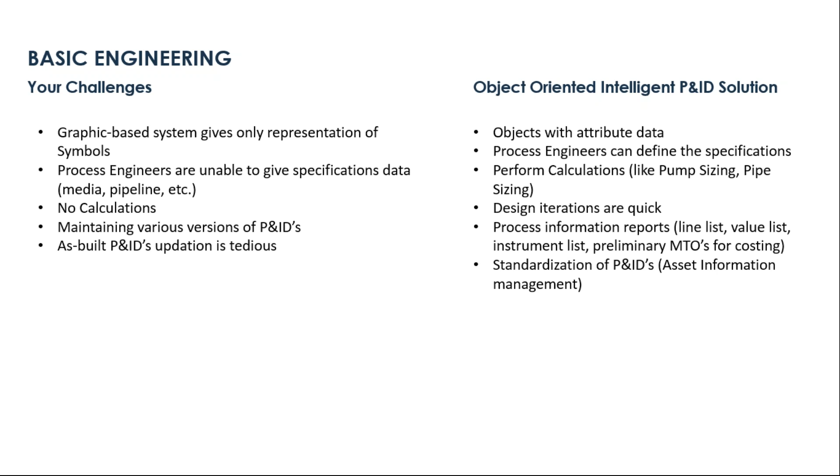Second is, of course, the pre-bid proposal or procurement team, where this team definitely needs a lot of material specifications. They need cost estimation information to do the bid management process. So they need a lot of procurement reports. They need a lot of asset information which they can actually use to plan their long lead items, buyouts, etc. So these are the challenges faced by procurement and pre-bid or proposal teams.

Talking about engineering and design, of course, the challenges are more where they want error-free P&IDs. Data consistency is a huge challenge again in this phase. They have to do a lot of design iteration. So you need a system which can handle change management in a very effective way. You need a system which can do built-in revision control or reports, or you can configure various types of reports. So these are a few of the answers to these challenges.

And lastly, the operations and maintenance team - this is the team who needs updated information at any given point in time. So maintaining and updating P&IDs is a very crucial part of it.

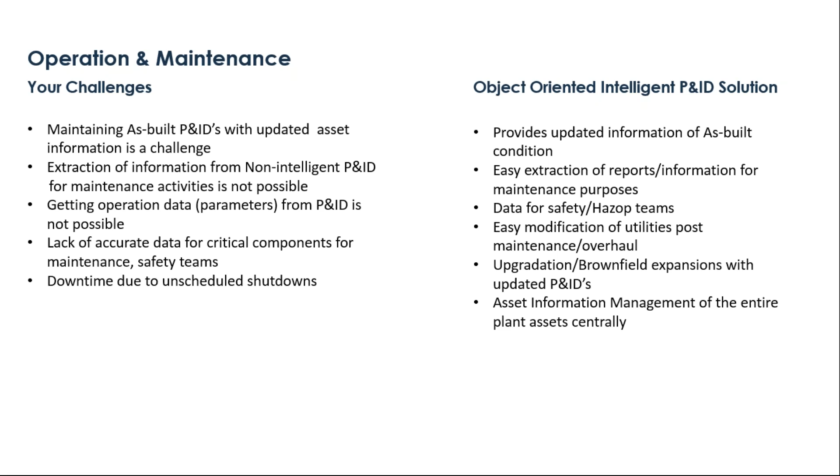The object-oriented solution helps in easy modification of all the utilities or plant objects, and any changes due to operation or maintenance should be updated in the P&ID, so that you have as-built P&IDs all the time. You can actually look at P&IDs as a good asset information source rather than just a P&ID drawing. Let's see what this object-oriented P&ID solution is all about.

We're going to talk about the calculation capabilities, the spec-driven or smart P&ID solution, what exactly it is, and how different it is from other solutions. We are also going to talk about revision management and change management for error-free P&IDs. These are a few of the benefits you are going to see in the live demonstration now.

So let us see what the system is all about.

As we talked in the presentation, we are going to go through a quick demonstration of CADISON P&ID Designer. We have gone through the different phases of the plant life cycle where P&ID drawings can be used, such as P&ID at concept or feed or basic engineering, P&ID at pre-bid or proposal, P&ID at detail engineering, construction, and P&ID at as-built, or asset management information. We'll see what type of different reports we can extract from our P&ID drawings at each phase, and also quickly go through some key features of CADISON P&ID Designer.

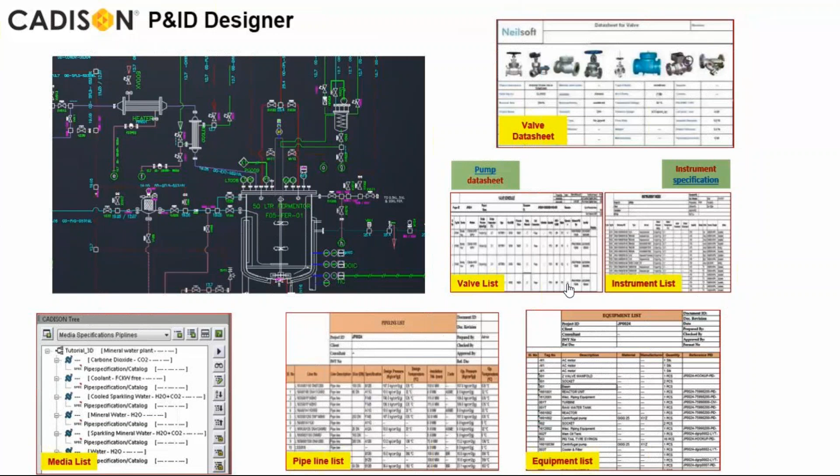So we will first talk about P&ID at concept, feed, and basic engineering.

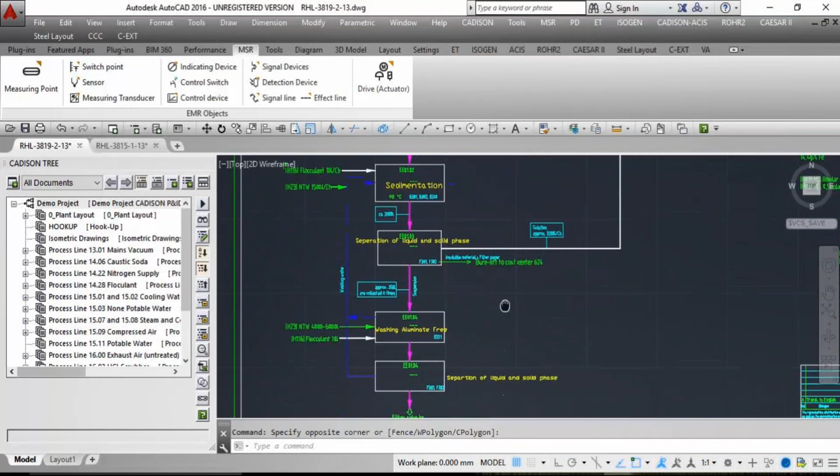This is one of the sample process flow diagrams which has a couple of process blocks as well as connections to different medias. It's a process flow diagram for an alkaline extraction project where different processes are going on, starting from mixing, testing, dissolving, and sedimentation, as well as extraction of alkali.

Now we can quickly extract different types of reports during concept and basic engineering. First, on the left-hand side, you have the CADISON tree from where we can see what are the different medias or services used in my project, and from the project area we can extract the media list.

We can extract the media list either in Excel as well as in different other formats. We add it to our document folder and the media list will be generated. Here you can see different attributes can be populated and extracted to your drawings, such as media number, description, chemical formula, and the P&ID drawing associated with it. You can also have a revision document for the media list, so whenever you update your drawing, that will be automatically updated to your reports as well.

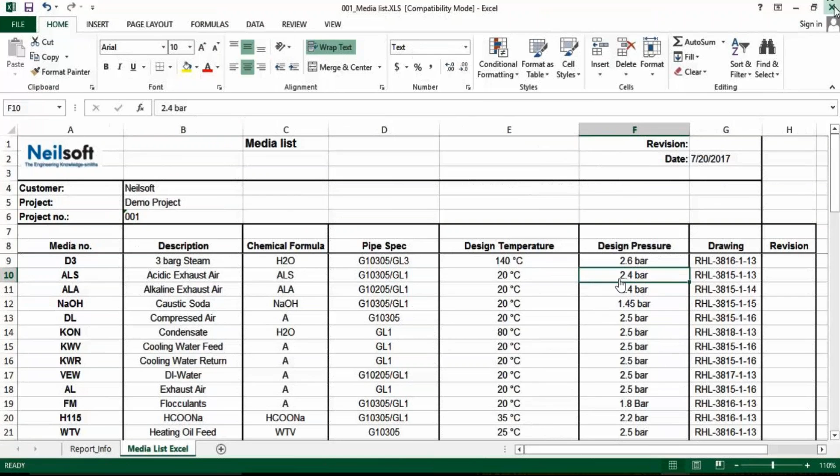As we have gone through the process flow diagram, the same process flow diagram will be used to create your P&ID drawings. So we have document folders for all the P&ID drawings, which have the medias or processes we have already created in our process flow diagram.

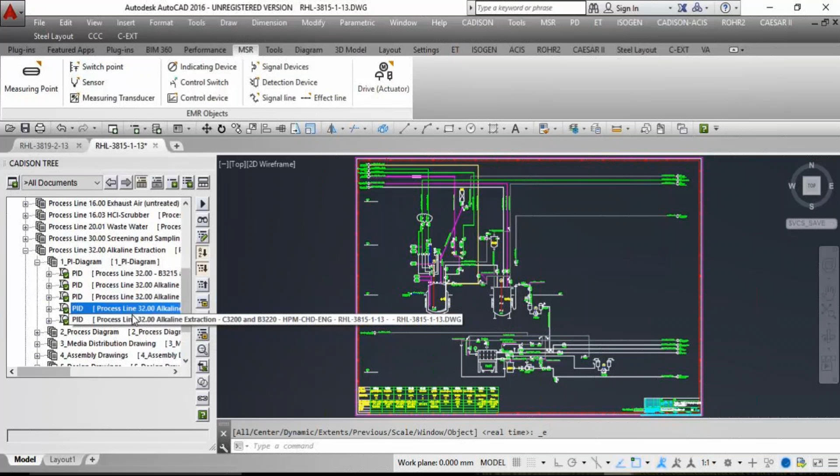We can also extract the pipeline list for our concept and basic engineering life cycle, where we can extract reports based upon our pipeline list. You can see the pipeline number reports with all the different pipelines, process media, pipe material, or insulation thickness, even with the P&ID drawing number added to your reports.

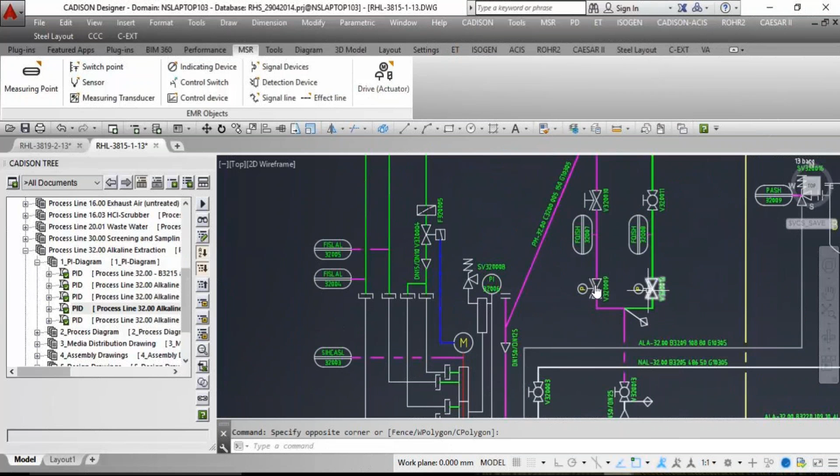As we have done for the pipeline list, similarly we have lots of valves in our PID drawings, so we can extract the valve list also based upon the different types of valves available in my P&ID drawing. Again, we can go to our P&ID drawing, go to the report folder, and quickly extract the reports.

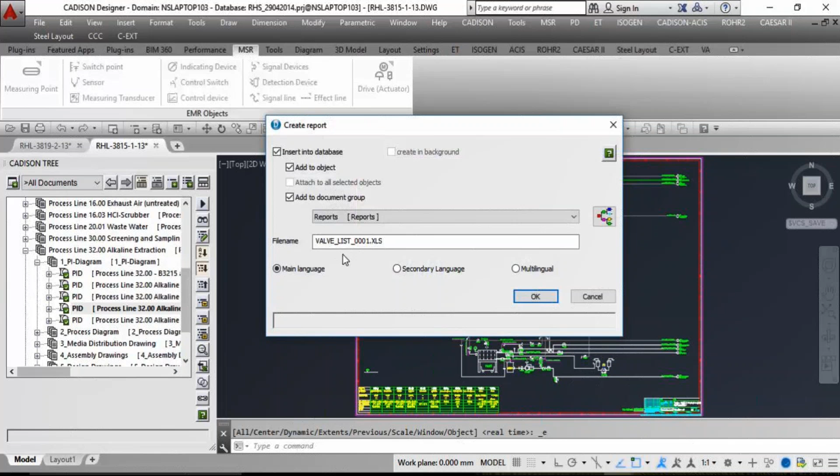There are predefined templates for all the reports available. This is some of the different types of reports you can extract using CADISON PNID. You can see for the valve data summary we have media information, valve description with the tag number, type of valve with the end conditions, and other specification-related values, with the PNID number added to your reports.

Another type of report you can extract is your instrument list. So you can go through the different types of instruments, and its information can be available using the object inspector dialog box.

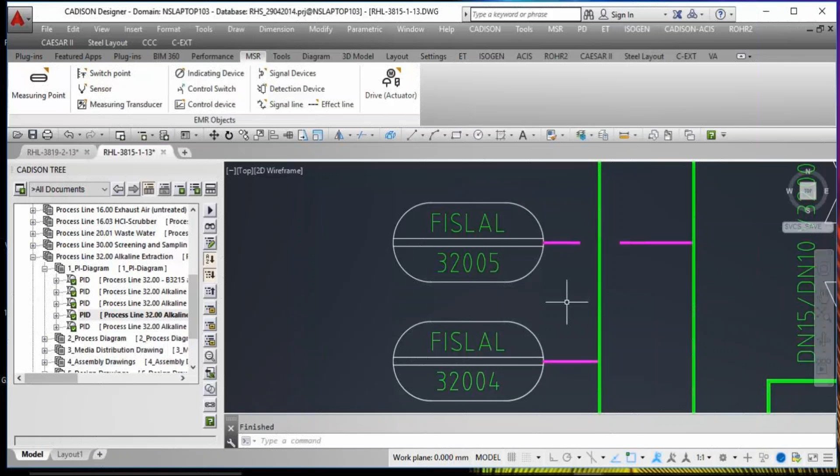There are different types of instruments that can be created, whether it's a measuring point or an instrument for a safety valve.

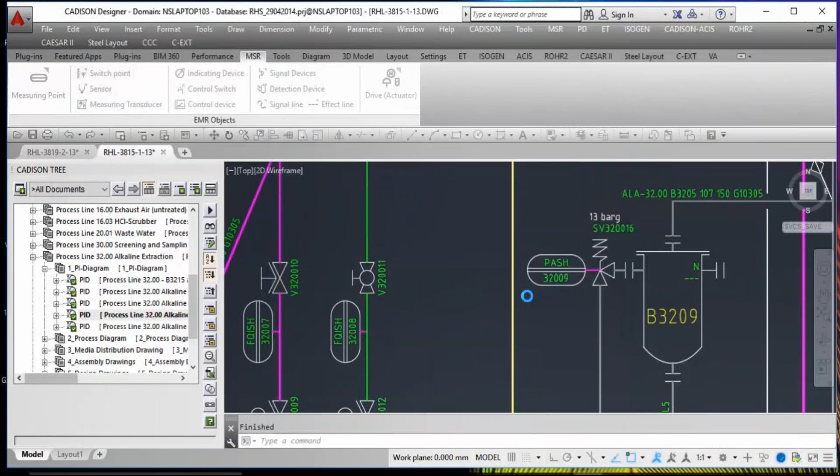So you can extract the instrument list reports from PNID drawings. Let's say we select the instrument list report template, and your instrument list reports will be generated. This is how we can quickly and easily extract reports based upon the objects available in your PNID drawings.

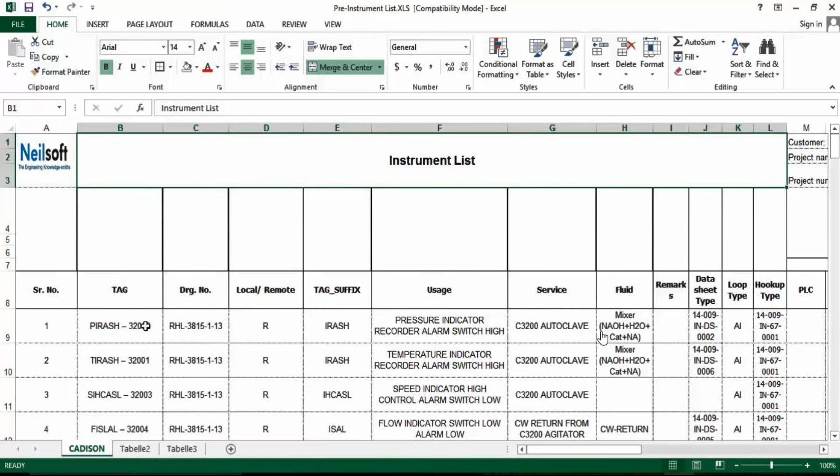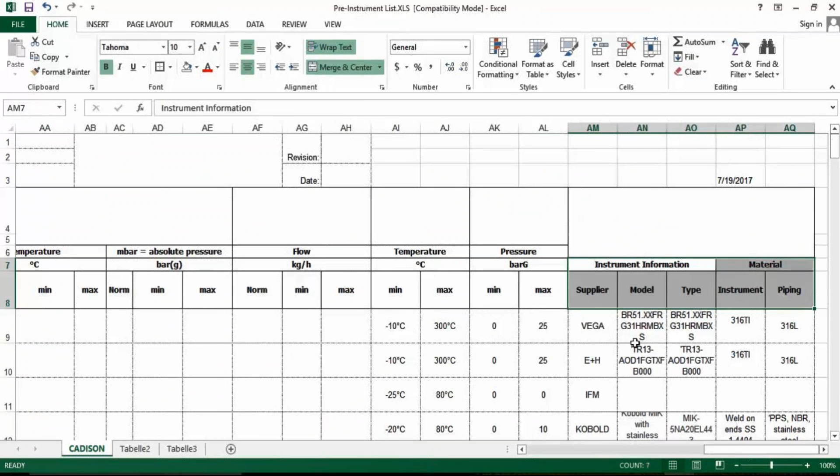These reports are fully configurable. You can add or remove any properties from the report template as required per your project requirements. You can see tag numbers, drawing numbers, different information related to your instruments available in your report format, along with supplier, model number, and types.

Now there are a couple of special components or special items in your PNID, such as coupling, compensator, or maybe a strainer, pulsation damper. These are all special items. You can generate reports for your special items also, which will have different templates and different attributes available.

This is a report for special piping components, item names, type of component with a tag number, size - all those values will be populated. Even the quantity can be generated.

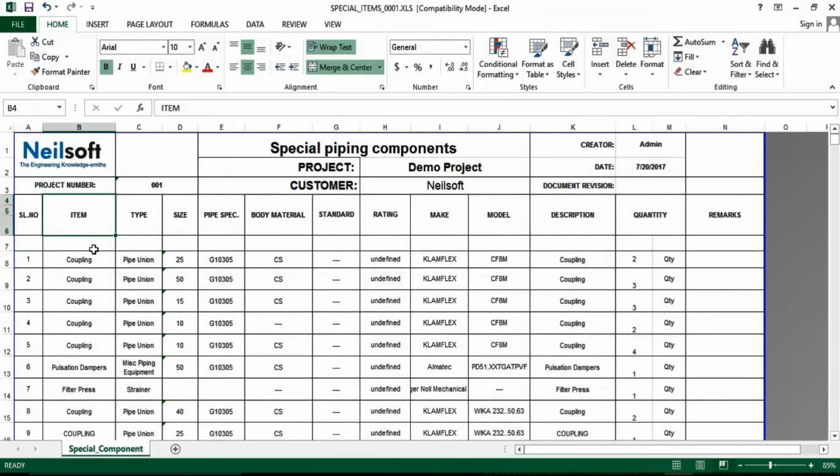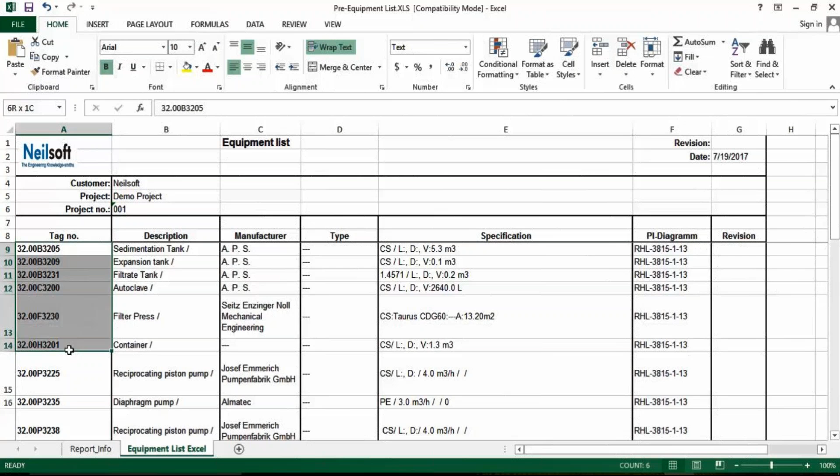Lastly, we have a couple of equipments available in PNID, such as sedimentation tank or filter press. So we have reports for vessel list also, because in basic or concept engineering we generate the vessel list also. This is a predefined equipment list available with all the tag numbers, description, and specification details with the drawing number.

Now we have seen the PNID at a concept or basic engineering phase. Let us go through the P&IDs and see how different types of reports can be generated at the pre-bid and proposal level.

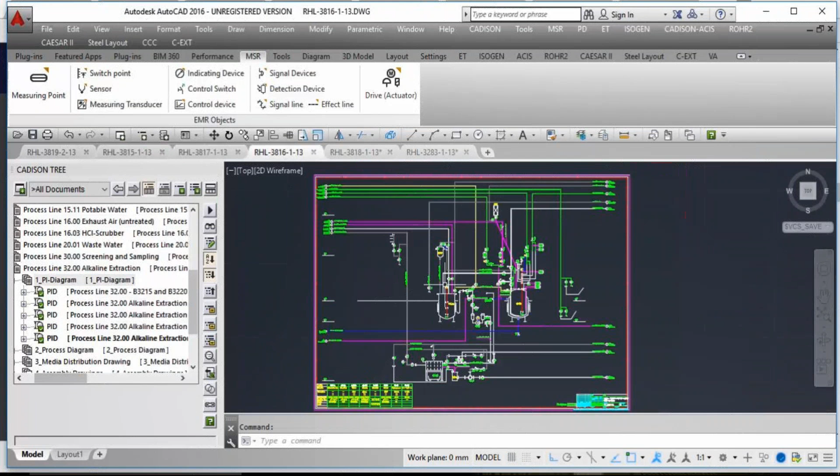Once our concept engineering is done, during pre-bid we can have a couple of P&IDs. Right now you can see there are 4 or 5 P&IDs available on your screen. During the pre-bid phase, I want to generate the list of P&IDs for our pre-bid or proposal engineering, based upon our document folder level.

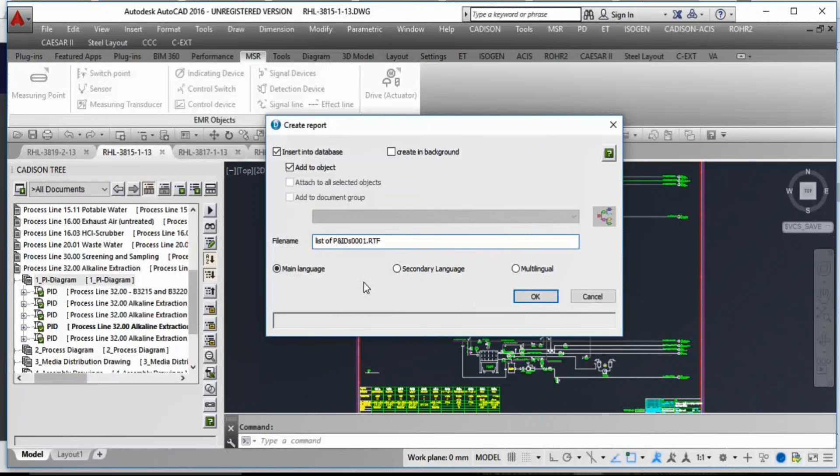You can have the reports in Word format as well as in Excel sheets. Here you can see the description of your P&ID drawing, drawing number, sheet number. If it is a revision, you can get the revision number as well as the creation date. This type of report you can quickly and easily create at any level - at the drawing level, document group level, as well as the project level.

We have seen during the pre-bid phase the list of P&IDs. Now let us quickly see the equipment list for all the P&IDs at the document folder level. We can create these reports.

So we'll go to the vessel list Excel report template, and we can say this is a pre-equipment list for the pre-bid proposal level. Based upon the number of P&IDs, it will generate the equipment list, which consists of all the tag numbers for the equipments, description, different equipment specifications, capacity or volume, and design conditions also.

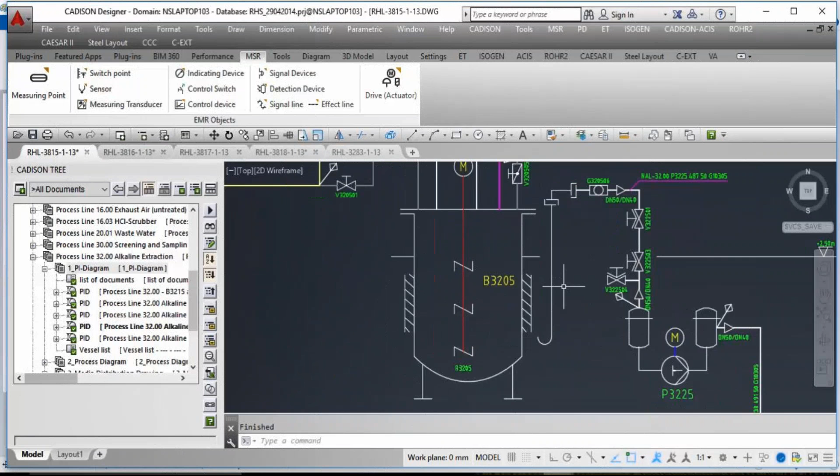Now, one of the important report formats during our pre-bid is data sheets for the equipments or for the pump data sheet. For example, we have a sedimentation tank with tag number B3205, and it has all the relevant information in your PNID, and we want to generate quickly a data sheet for this equipment.

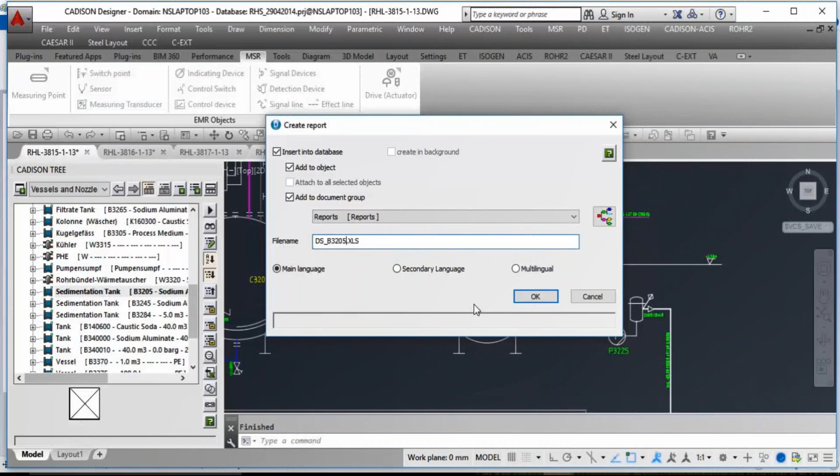On the left hand side we have the CADISON tree, where we can filter out to our equipments. I will just filter out to my sedimentation tank, and generate the reports by selecting the sedimentation tank there. So it will add the file name for the datasheet for B3205, and based on that our data sheet is created.

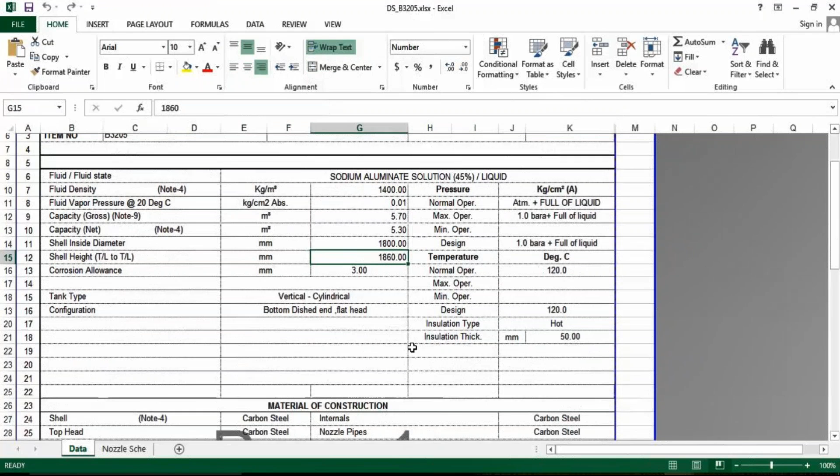You can see it is showing all the relevant details of your project - first of all the location, project number, what service it is flowing, the item code, the data related to fluid state, capacity and specification details of equipment, and material of construction also.

You can also have, based upon the data sheet template, a nozzle schedule where all the information related to nozzles can be seen in your data sheet report. So this is a simple example showing that whatever data or information is in your P&ID drawing can be automatically extracted to your report formats based upon your project requirements.

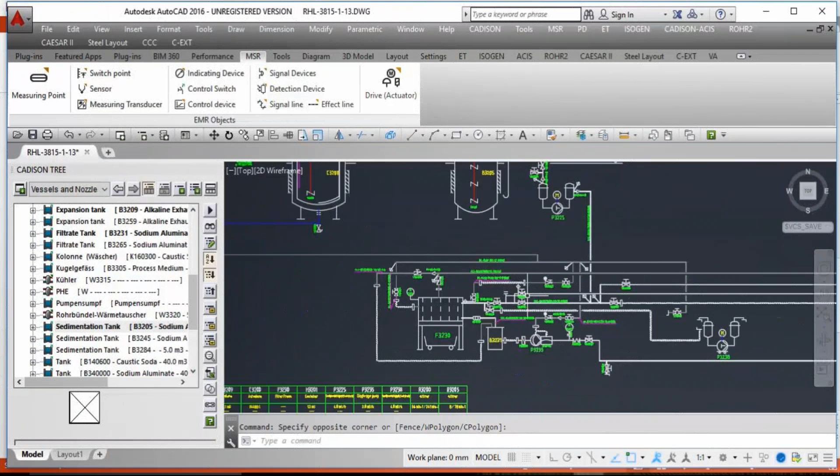Another important document during our pre-bid and proposal engineering is cost estimation. Let us quickly take an example where you have a number of valves in your PNID drawings, different types of valves, and we have to quickly do the valve cost estimation.

If we select a valve, we have an attribute known as list price. This list price can either be taken from a vendor catalog, added manually, or we can import it from an Excel sheet format to add that list pricing. Once the list price is added to an object, we can extract the reports for the cost estimation of the valves.

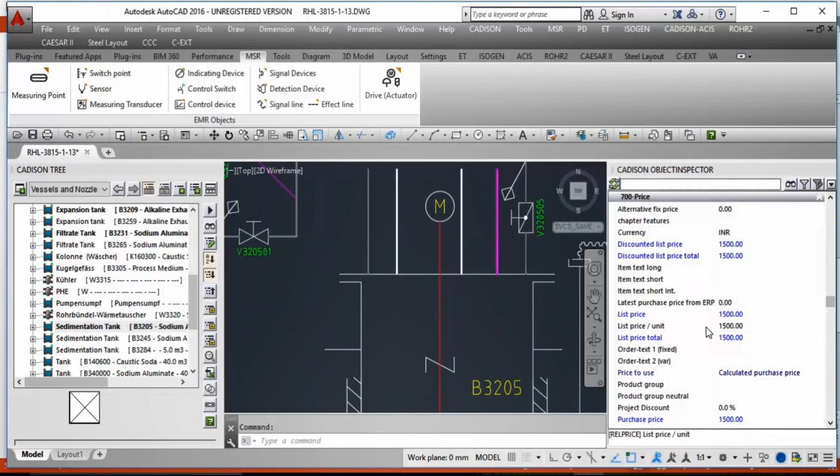So if I go to my project level, at my document folder, select the drawing and go to the reports, we have a report template for proposal valve cost report, and we will generate the report in Excel sheet format.

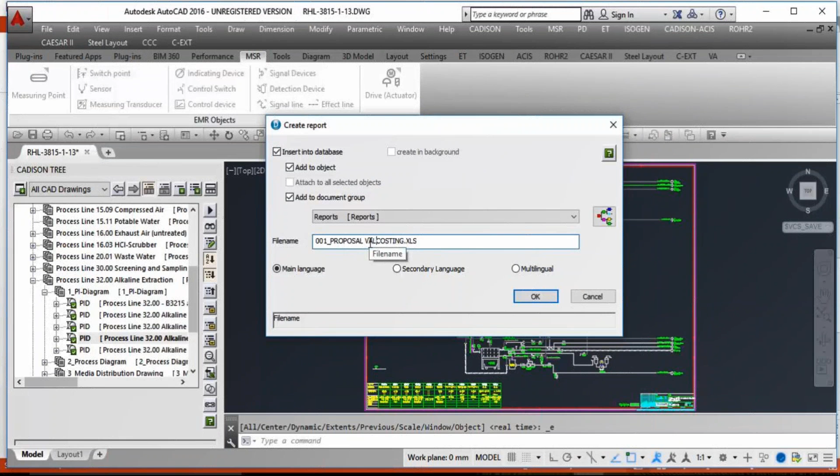Once the valve cost estimation is generated, it will show not only the costing but all relevant information for the valves, such as area description, area codes, item tag number, and cost related to that. Even the quantity is available. This is a sample report template for cost estimation, fully configurable based upon your project requirements. Once the valve cost estimation is done, your total cost value will be added to your sheet.

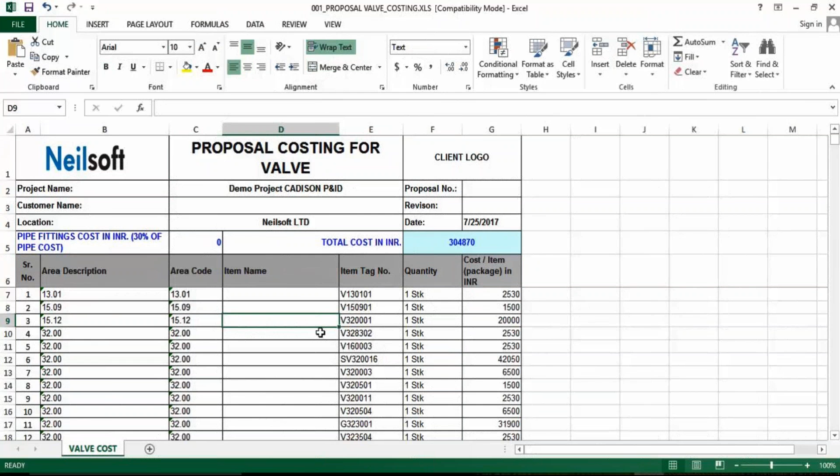Next, we will quickly go through the P&ID at detail engineering and construction stage.

In detail engineering, different types of reports are generated, such as the final list of P&IDs at project level. We can go to the project level in the CADISON tree, where we see a lot of P&ID documents available, including PFD drawings, media distribution drawings, and different P&IDs based upon process in your projects.

You can go to your project level and select the template for list of documents, and generate the reports for final list of P&IDs.

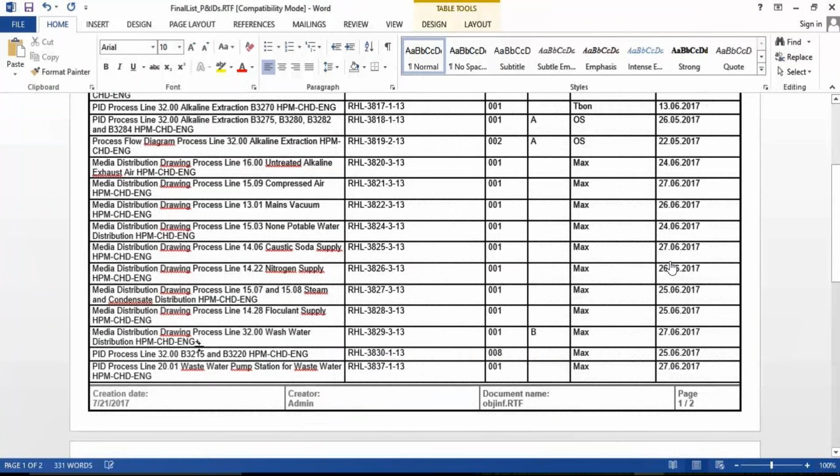This is a word template for the reports. You can also have the Excel sheet template where you see the description of your P&ID drawings, drawing number, creator, and creation dates. This template can be configured, and your own custom properties can be added.

Once the list of P&IDs has been finalized, you can create, based upon different P&IDs, the final list of pipeline list.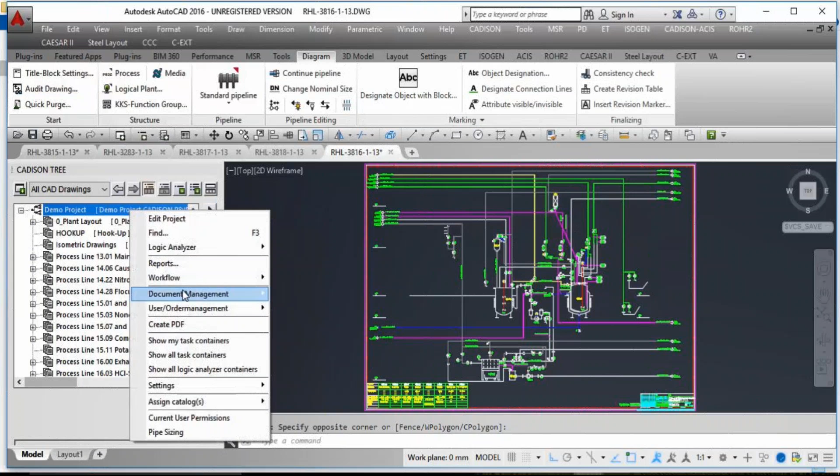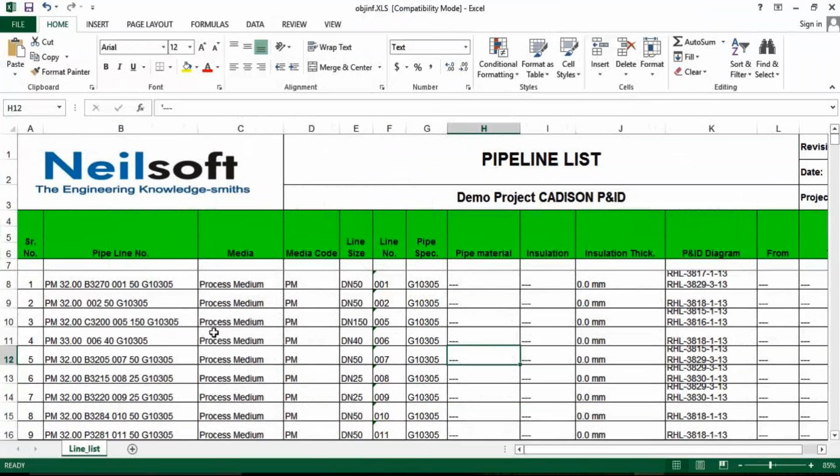Again, I can go to my project level and generate the reports for pipeline list. This is the final list of pipelines, which has all the relevant information for the pipelines, media code, insulation thickness, and what P&ID drawing the pipelines consist of.

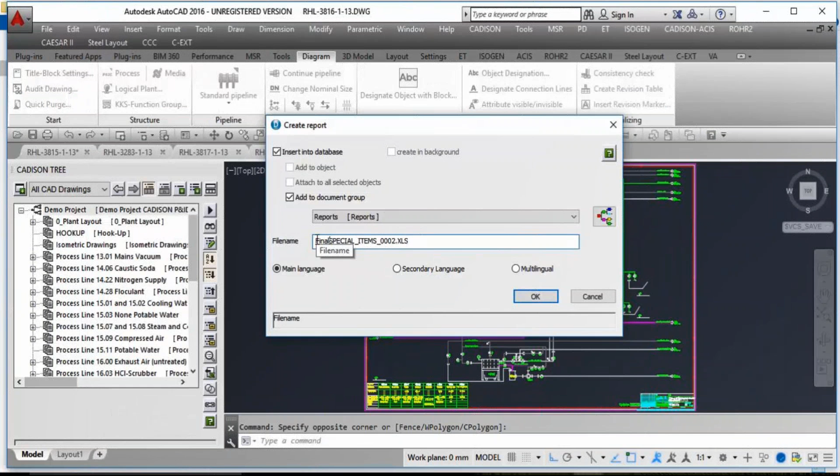Next, you have the final equipment list. Based upon the different P&IDs in your project, before that, we will see the final special component list available based upon different P&IDs.

You can see for the couplings, all the items are available. Pulsation dampers, strainers, sight glass, all the special component list with its tag number, material, and size is available.

Now we will quickly discuss the last stage of P&ID, that is as-built or asset information management.

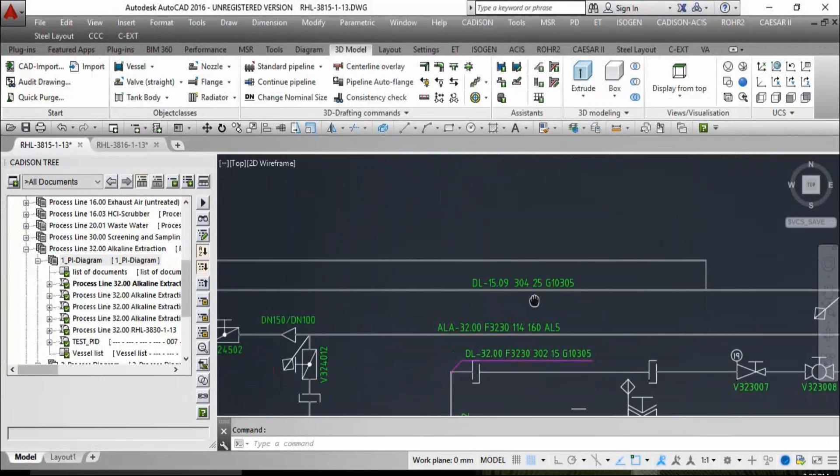During plant design, every project has different types of tagging systems. You can see we have different tagging philosophy in this P&ID for pipelines, and we have different tagging systems for valves as well as equipment.

By default, there are two different types of tagging systems available in CADISON. One is standard and another is KKS.

Tagging systems can be changed based upon project requirements, and users can add their own tagging requirements as per the project requirements.

So how to configure the tagging philosophy for a pipeline or for different types of objects available in your P&ID. Let us quickly go through one example, if I edit a pipeline in my CADISON tree.

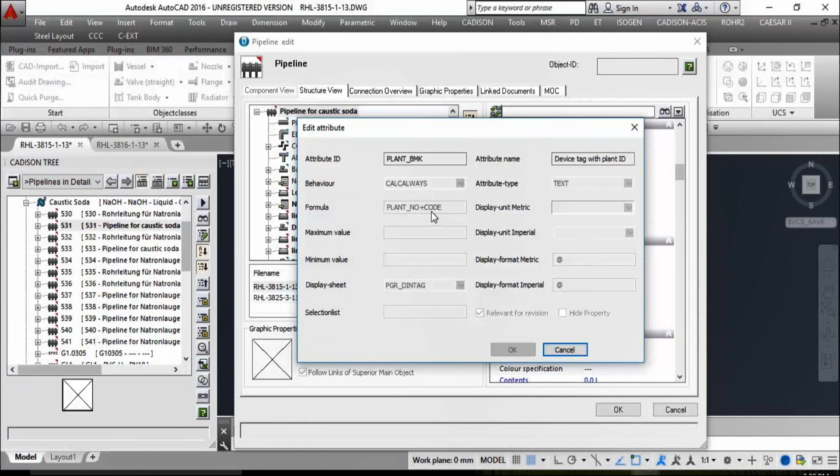We have a property known as device tag with plant ID. This has a formula which shows that the pipeline tag number has been created from two attributes: one is the plant number and the code. Using these two properties, we can create our pipeline tagging.

This is one example. In the same way, the tagging for other objects such as equipment, valves, or instruments can be created and formalized based upon different attributes.

As we are talking about asset information and as-built, these P&IDs can be used throughout your plant life cycle, and can be used as the maintenance documents.

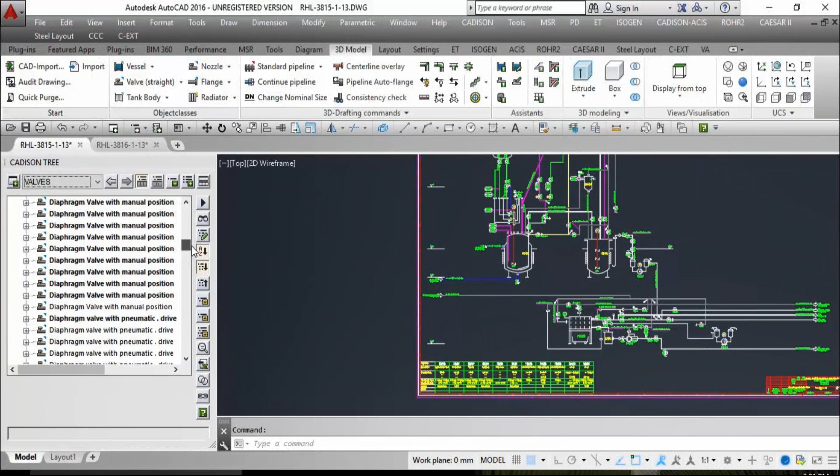For example, if you have different numbers of valves available, you can quickly select the valves in a tree and zoom and highlight them in your P&ID drawings. If you have a complex P&ID drawing, objects from a tree can be selected and quickly highlighted and zoomed to the area in your drawing.

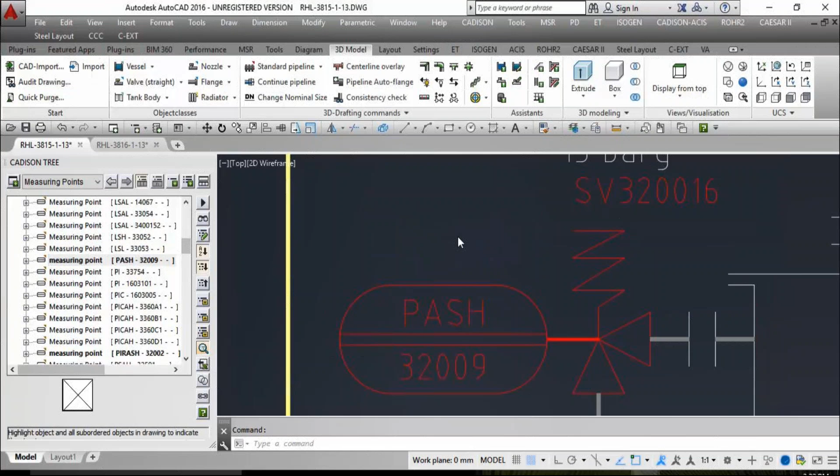Such as for instruments, you can select them from your CADISON tree and zoom and highlight to your graphical area.

Next, I would like to talk about asset information and its management. We have bidirectional links of CADISON P&ID with an ERP interface, where all the P&IDs with their standard items can be stored in the CADISON database, and from the CADISON database the properties or attributes can be linked to the ERP projects, such as your material, desired delivery date, suppliers, etc. And in ERP we can add more information related to projects, such as pricing, order confirmation, etc., which can be brought back to our CADISON database as well as your P&ID drawings.

So this interface gives an advantage where all the data from the P&ID can be brought to our ERP systems so that it can be used by procurement teams, and then procurement teams can give their data or information back to the CADISON database, which can be brought back to your P&ID drawings, and you can generate the reports based upon the project requirements.

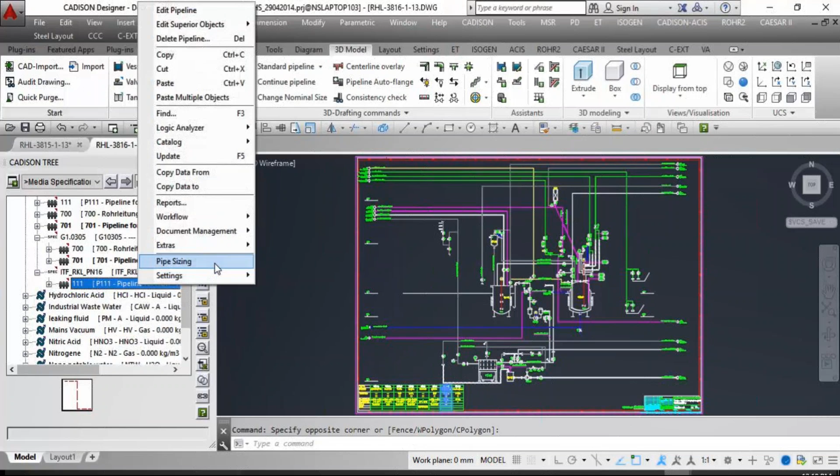At the pipeline level, you can do your sizing calculation. So in order to size the pipes for optimal economic requirements, CADISON P&ID provides a new feature to conduct the pipe sizing calculation, which accurately estimates the pipe diameter, pipe thickness, and the pressure drop in the pipes. The pipe calculation feature utilizes the resistance factor method to calculate the parameters.

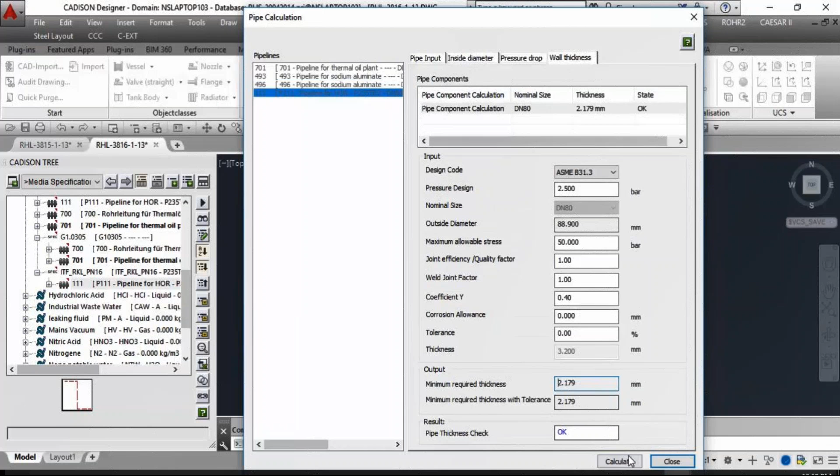So you can provide the inputs such as inside diameter and other pipe relevant inputs, and you can calculate the outputs in terms of pipe diameter, pressure drop, and the minimum required thickness for the pipe. Based upon the inputs, you can do the sizing calculation for the pipelines.

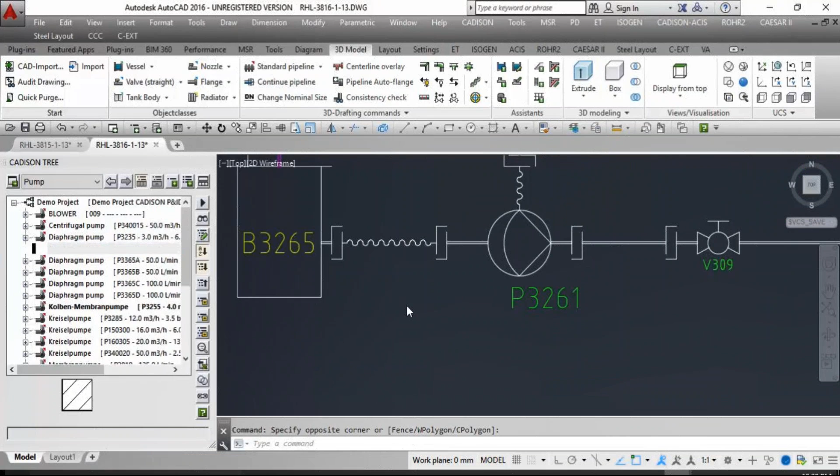Now, as we have done for the piping, the same thing we can do for the pump sizing also. So CADISON also provides a feature for pump sizing, which facilitates appropriate selection of the pump. Pump sizing calculation performs hydraulic calculation for centrifugal pumps and estimates differential head, hydraulic power, motor power, as well as net positive suction head available.

So you can provide all the pump information such as your density, vapor pressure, pump efficiency, and you can provide inputs for the suction side as well as your discharge or pressure side, and based upon that your output will be available. That is your total differential pressure, pump power, net positive suction head.

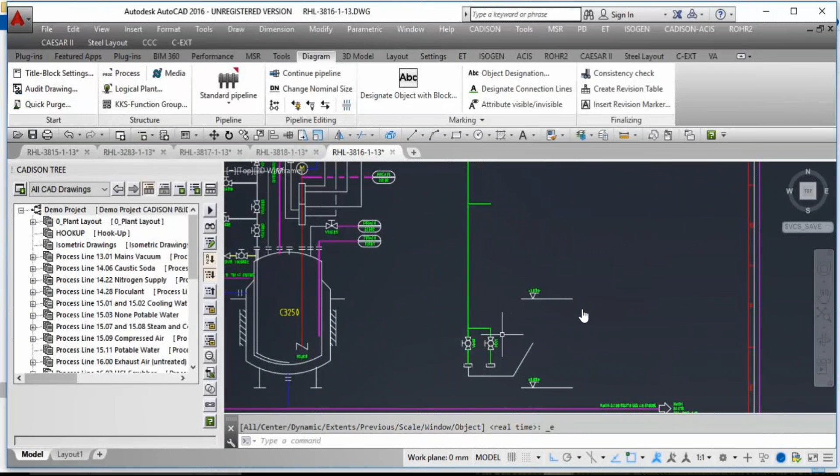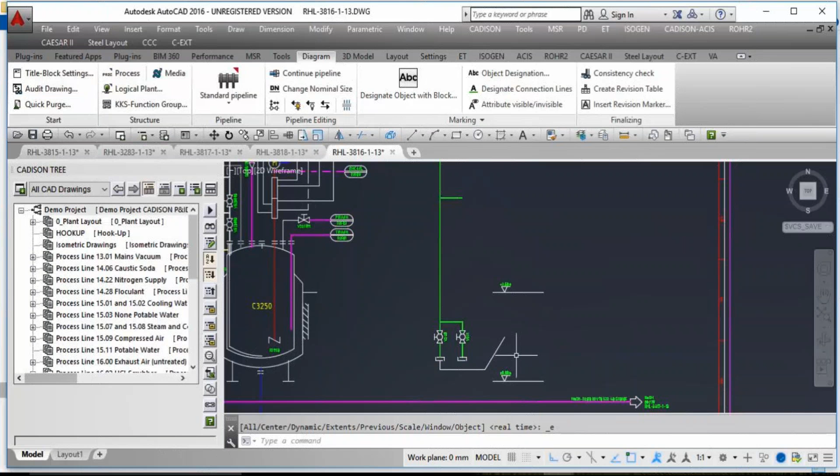Next is the construction set, which we call an assembly manager. So a construction set is like creating an assembly of objects which is connected to your pipelines. So we'll take an example here. We have a small valve assembly which is connected to a pipeline and inline objects such as coupling with hose, and we want to place it at the top of your pipeline.

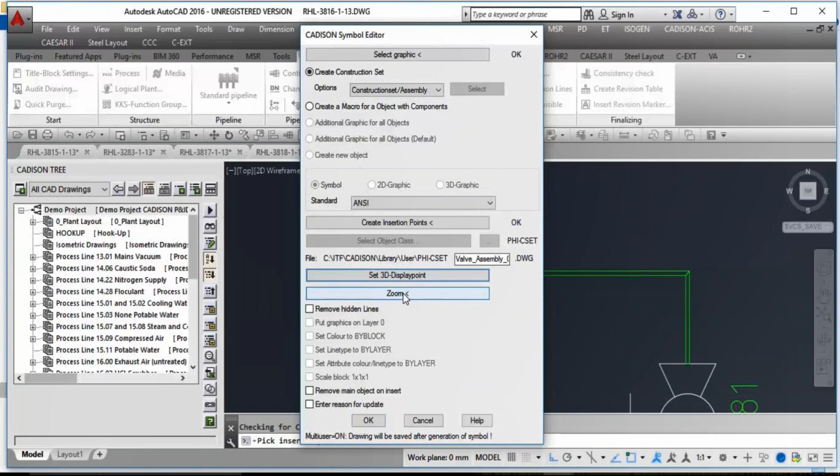So using the construction set tool, we can quickly select the graphical area which you want to place as an assembly, and we can specify for which standard we are taking this assembly. We can provide the insertion points which will be used to place this construction set, and we can give some naming convention to this construction set or assembly. Let's say I'm giving it as a valve assembly. The zoom option will provide you a graphical area which will be seen in your library.

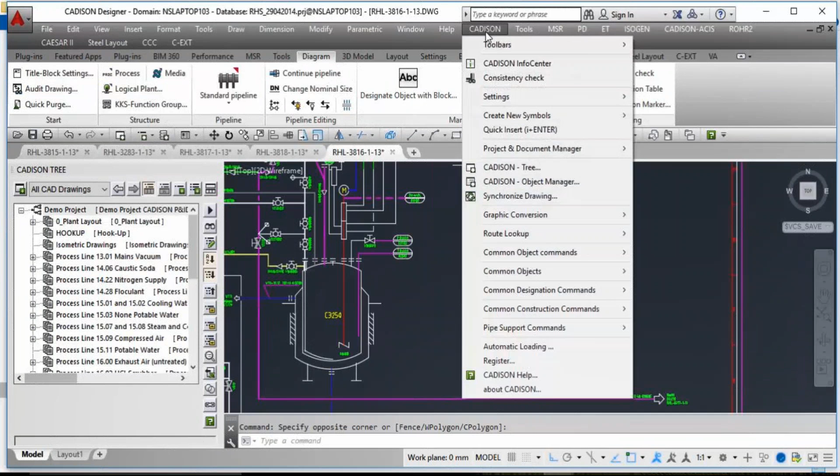So once the construction set is created, it will go to your object manager, which is a CADISON library, and you can have all your different types of assemblies available in your object manager. Now let's quickly place it on the above pipeline. So from our CADISON menu, we'll select the object manager, which is an assembly manager here, and we'll go to our construction set option. We'll quickly drag and drop our assembly.

Now the beauty of the software is this is not an overall assembly. These objects are placed individually with the updated tag numbers. So you can see the tag numbers have been updated, and these individual object reports can also be generated.

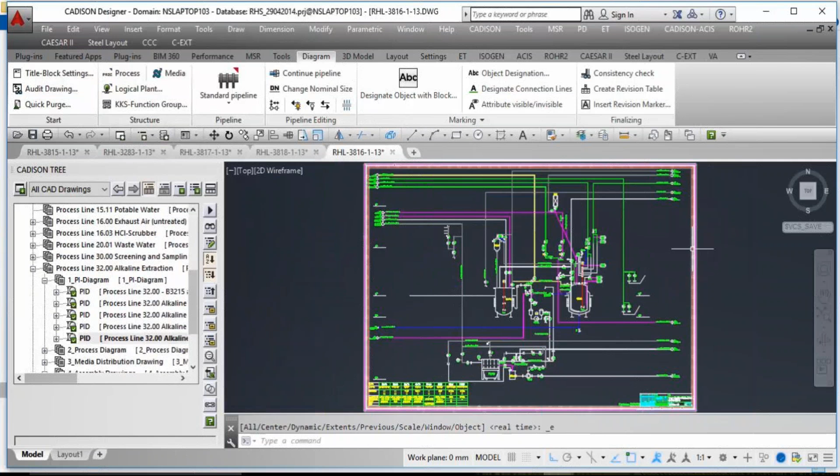So this construction set is an assembly which is not only used in the current project, but it is saved in your library and can be used in future in different projects, as well as in the current project with different drawings also.

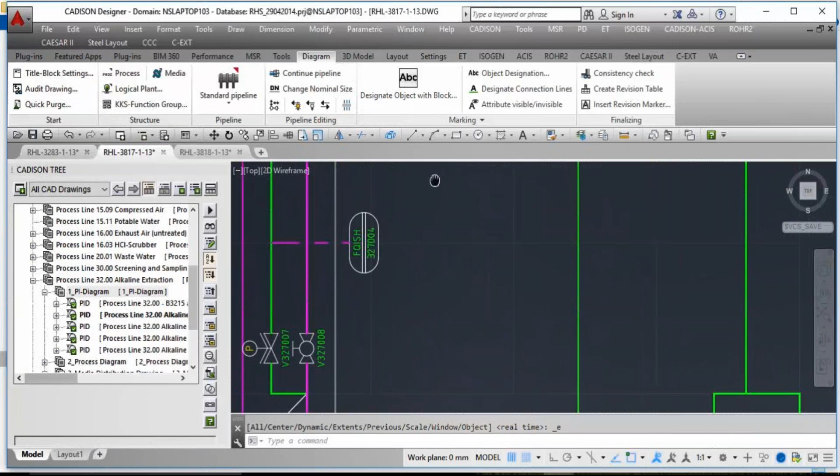Next we will talk about change and revision management. So during our P&ID creation or during our plant life cycle, we have different types of changes, based upon graphical changes as well as value or attribute changes. So we are taking an example where multiple valves are available, different types of valves, and how quickly and easily we can edit some properties for valves.

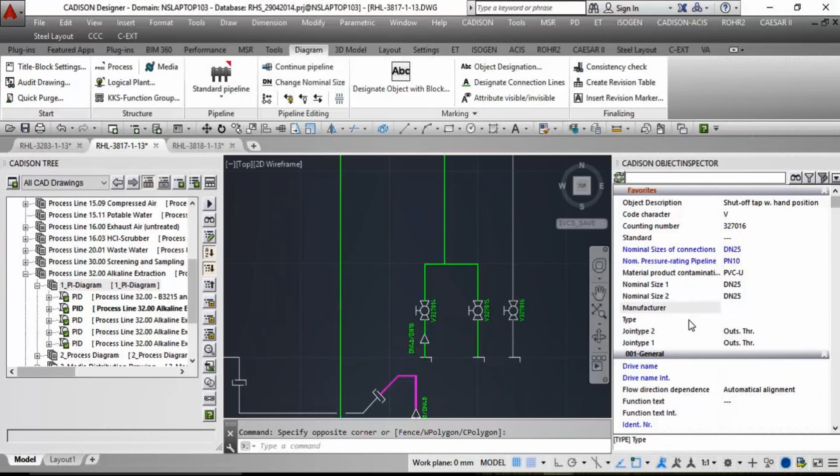So if you see, there is a ball valve whose couple of values are empty, such as if you go to our manufacturer value and type value, both are empty. So how quickly and easily can we do mass updates in our P&ID drawings?

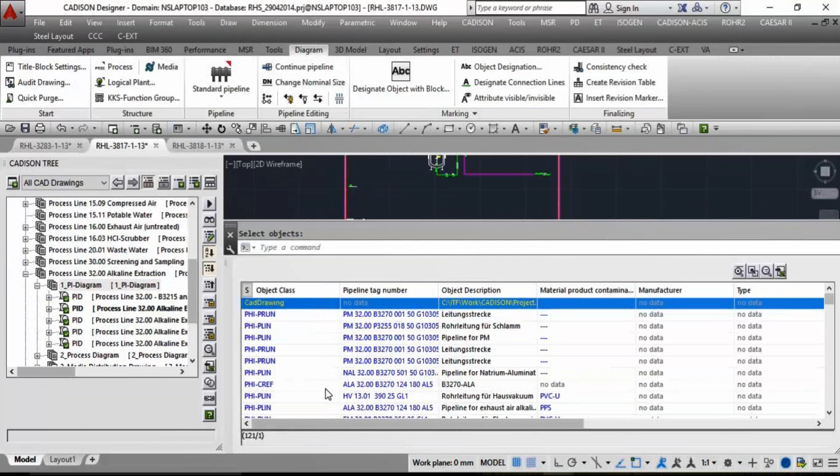So we can quickly select the overall drawing using the edit object command, and we will automatically get a spreadsheet which will have all the entities selected in our drawing. We can filter out our valves using object class name, and again we can sub-filter based upon the valve description. So here I am selecting ball valve.

Now I can see there are 7 ball valves available with their manufacturer and type value empty. Now the question is how we can quickly add those values to the manufacturer property and type property. So we have an option where we can select the property name using the fill and number option. We can give the property value one at a time, and automatically the values will be updated for all the valves. Same way we can do it for the type property.

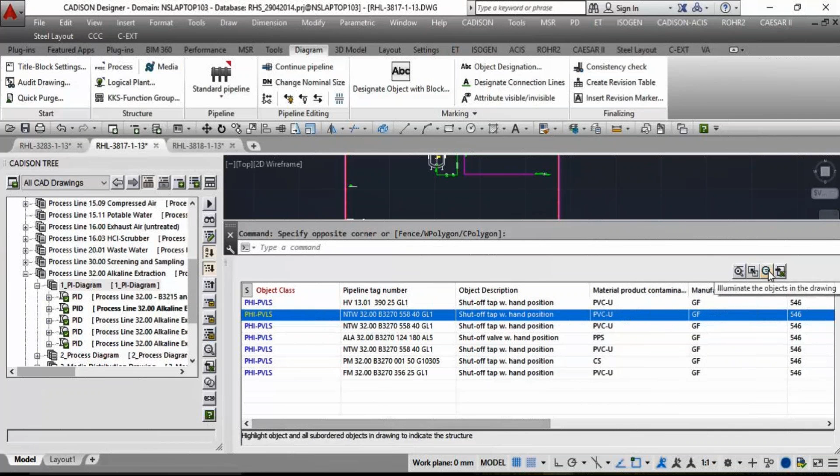So you can see the values have been updated. In this way, if you have suppose 50 or 100 valves, you can select all the valves, get this spreadsheet, and using the fill and number option, all the values will be updated. To verify it, we can select one line of the valve and zoom and highlight in your drawing, where we can check whether the valve property has been updated or not. And you can see once we edit the valve, the manufacturer value and type value have been updated.

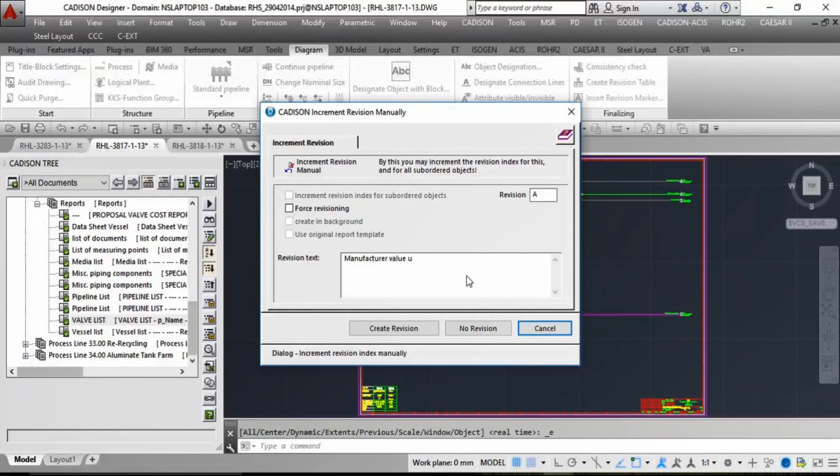Now after the changes have been done, these changes will be automatically updated in your reports also. So you don't have to create new reports. If you go to your reports folder using the CADISON tree, all documents, you don't need to create the report. You can just update the reports. It will automatically create a revision of your reports where you can provide the revision text, such as manufacturer value updated, and you can have a revision of your reports also.

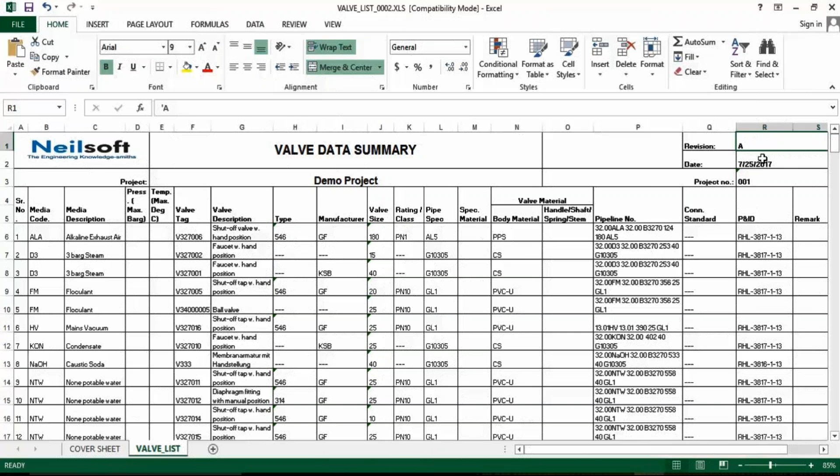So once the valve data summary is extracted, you can see for the ball valves, the manufacturer value GF and type 546 is updated in your reports. And also a revision A has been generated for your reports. So this shows the revision management also. Once the changes have been done in your drawing, the revision of the reports will be generated automatically.

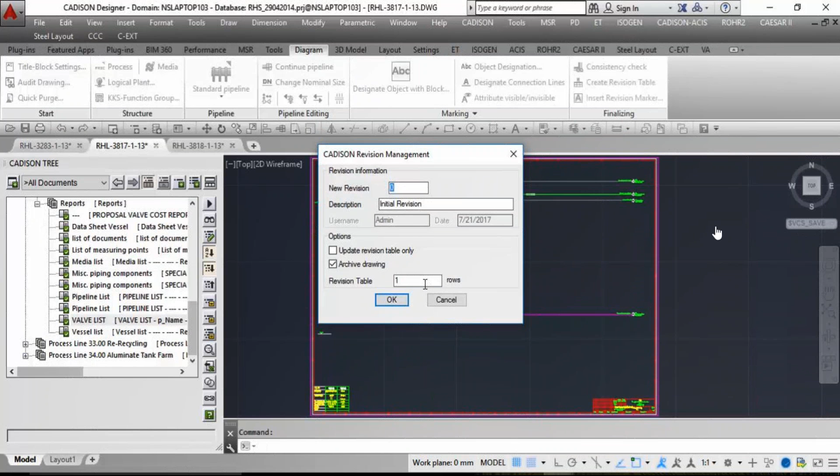Now comes the revision of your drawing. Once the changes have been done in your drawing, we have an option to create a revision table where you can have a new revision for your drawings. You can provide some description to this drawing, and once you click OK, your revision will be added to your revision table near the title block. So you can see the initial revision has been added.

So how to verify my drawing is revised or not? If I go to my documents, all documents in the CADISON tree, and filter based upon all documents and revisions, and once again go to my P&ID drawing in my CADISON tree, we will have a revision of the drawing with the description also. That is the initial revision, who has done this revision, as well as the date.

So this is a small example of how changes take place in a P&ID drawing and how quickly and easily you can update the changes in your P&IDs, and that will be updated in your reports as well as the revision of your drawings also.

Now once the drawing is created, you have to annotate it, or you can designate it based upon the properties of your objects, and you can generate legend sheets also. Let us go quickly through the object designation and legend sheet command.

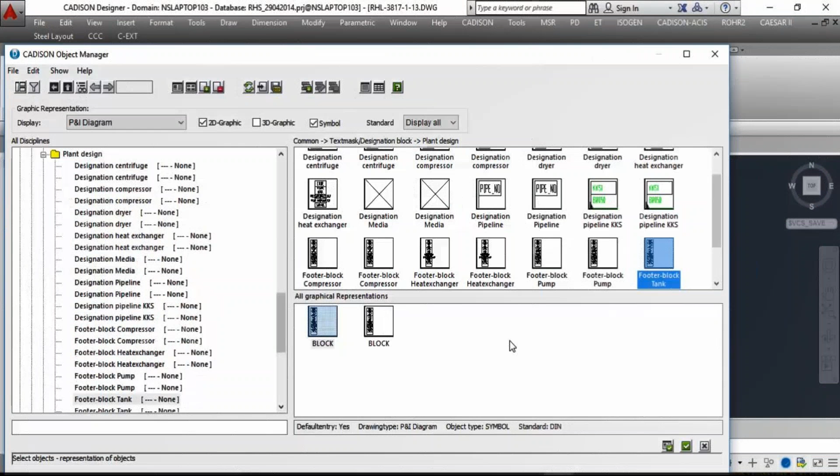So the object designation command is used to provide annotations to the objects placed in the P&ID drawings. These designations or annotations can be configured and saved for further usage. You can see right now equipment has some information, and we can create some typical text masks. We have predefined text masks available. We can even create our own text mask templates and add them to our library.

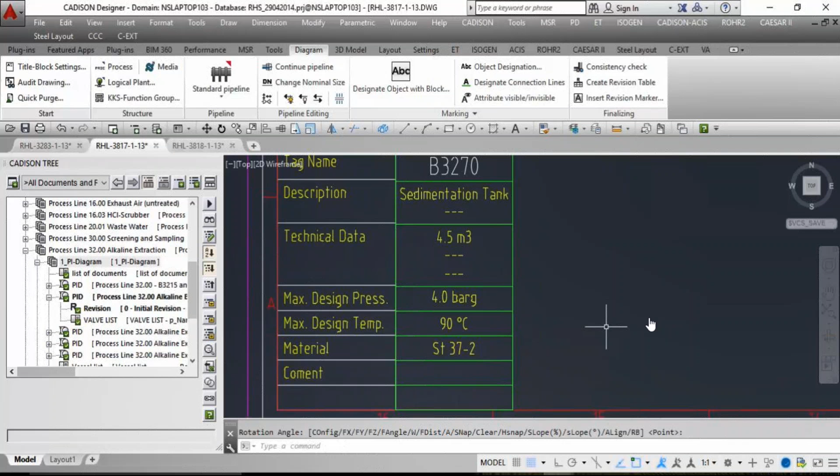So here, using the graphical option, we can select the object and the text masks will be created based upon the template. You can see for the sedimentation tank, tag number and other technical data, specification data is available. In the same way, we are going to do it for the stirrer also. From my library, we can quickly select the template, and using the graphical option, the text masks will be created.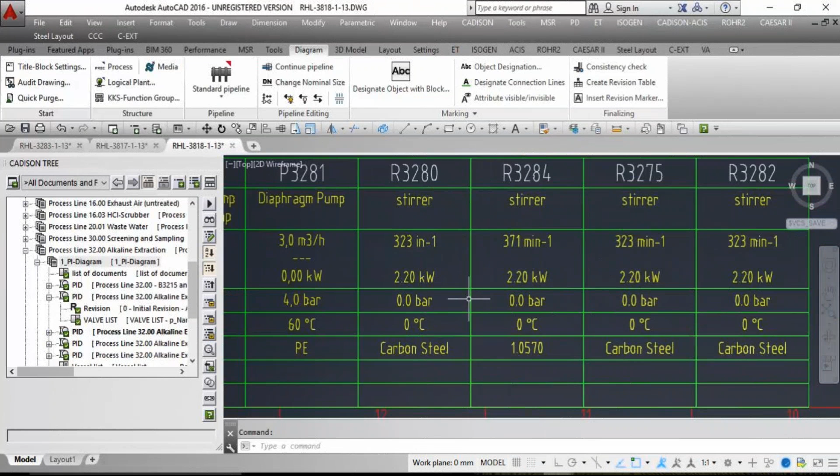Here are some quick examples of text marks which are already created, and these types of text marks you can add to your P&ID drawings. This is the default template, but you can customize the text mask template as per your project requirement.

Next, we have different types of object designations available, and you can configure them and save them for future use. Using the common designation command, you can select the object to provide the annotations and configure it based upon the properties required. For example, for a pipeline, I am taking my tag number first as a sub plant, that is plant code. Then I'm taking the media number, and we can provide free text also. Then the piping specification, and let's say the last one as the counting number, that is the pipeline number.

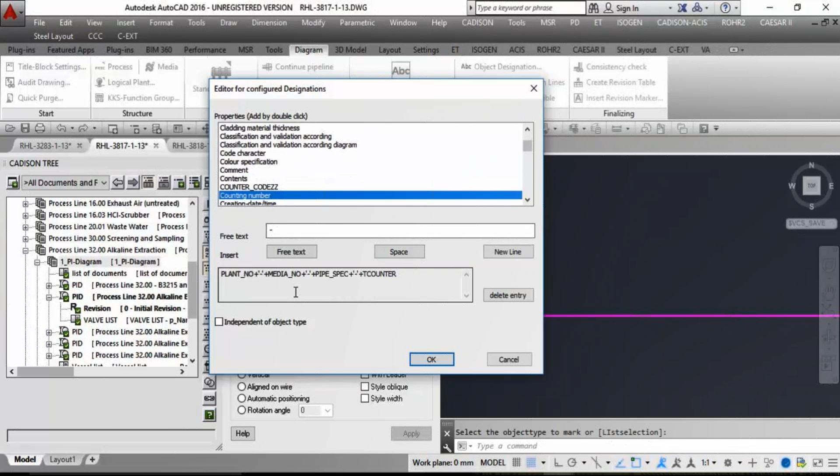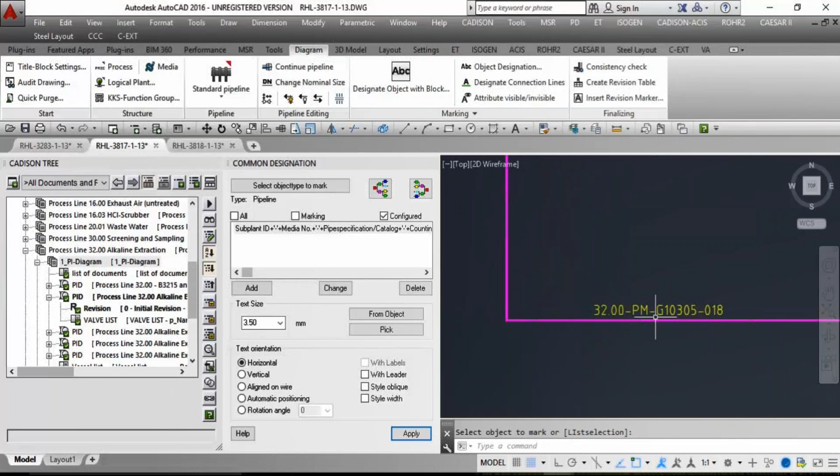Once my formula is created for my annotation, I can click OK, provide the text size, whether we want the orientation of the text horizontal, etc. And we can apply it to our pipelines. You can see, based upon the formula used, my plant code, media, specifications, and the line counting number are added to my pipeline in my P&ID drawing. In the same way, we can quickly annotate the other pipelines also, and my value is updated.

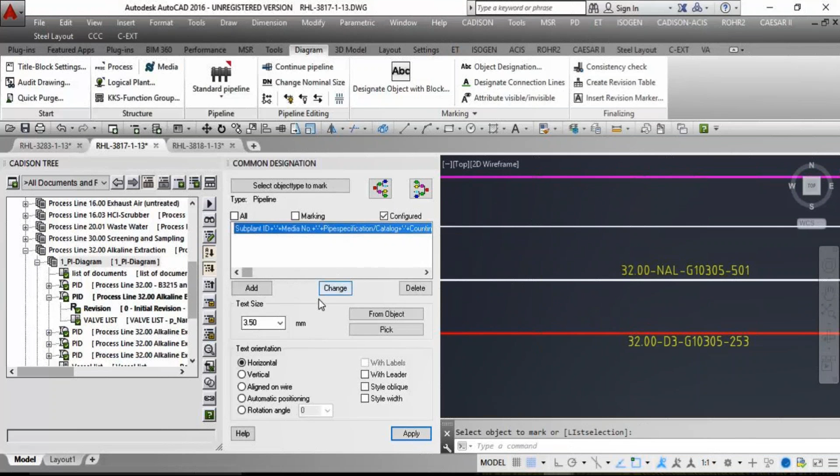Now the beauty is that if any changes are done in your P&ID drawing, these annotations will be automatically updated. You can add as many attributes from your object designation to different objects, such as your equipment or inline fittings such as valves.

Now, once your P&ID is done, we can quickly generate your legend sheets based upon your P&ID drawing. We have a default legend sheet template available, and based upon the objects placed in your drawings, your legend sheets will be created, and all the object symbols with their descriptions can be added as a legend. You can see all the components or symbols used in your P&ID drawings. It will create a block which will contain the symbols with their descriptions.

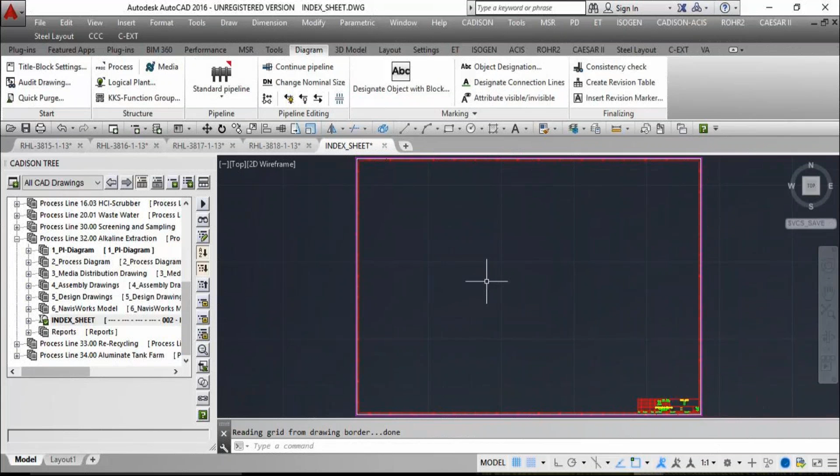Next is index sheets. An index sheet contains the list of the drawings present in a document folder or a document group. We can quickly create a new drawing and name it index sheet. We can open it and place a title block and border which will contain the list of P&IDs used during my project. This is an empty title block and border, and from my library I will select the template for the index sheet and select the list option, where I can browse to the document folder or document group where all of my P&IDs are available for the project.

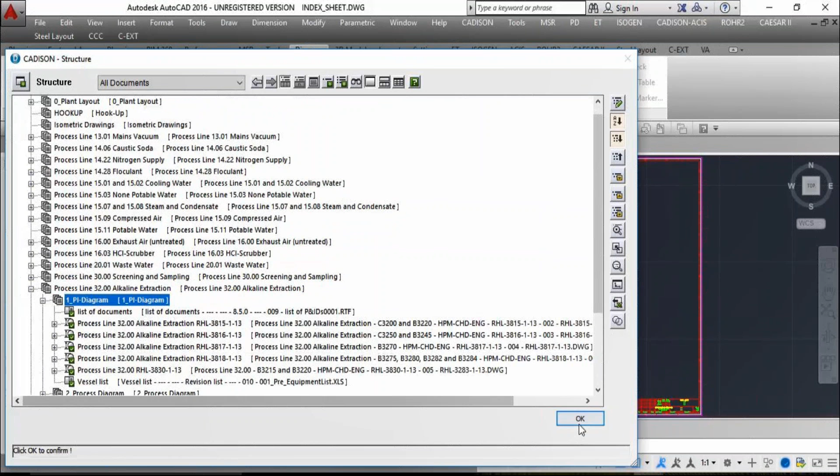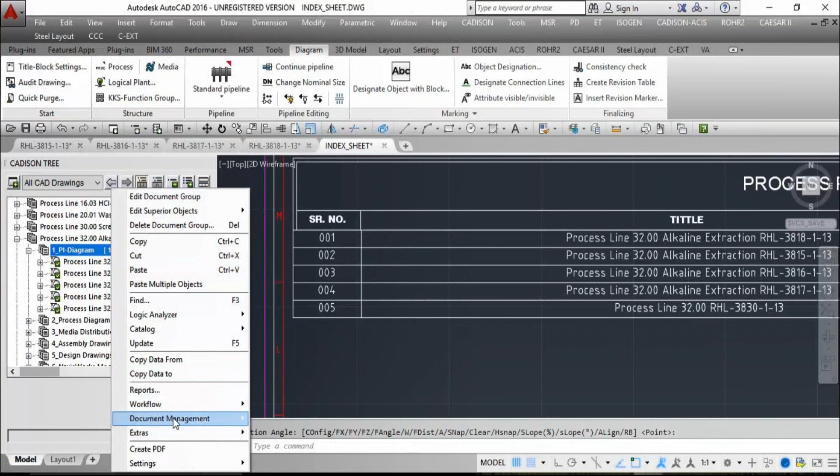Once I select the document folder for the P&IDs and click OK, it will automatically extract the list of the P&IDs as an index sheet in my drawing. You can see the title number, serial number, drawing number, if revision has been done, and remarks can be placed. Another thing is that if any P&ID drawing has been added to the document folder, this index sheet will be automatically updated.

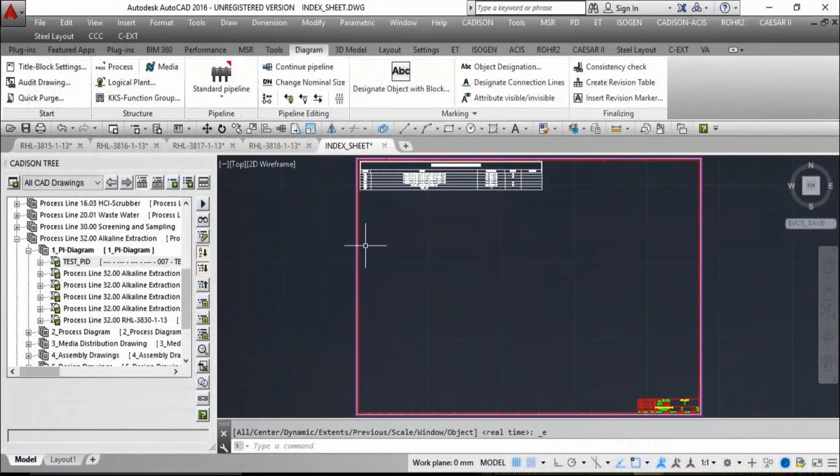For example, I am creating a drawing and giving the name TEST_PID. You can see the index sheet is updated automatically with the title and the serial number. If we edit the sheet number, let us say 007, and change the description to TEST_PID, that will be automatically reflected in the index sheet. This gives you an advantage: once your index sheet is created, you don't have to create it again, and it will be automatically updated based upon the new drawings added to your document folder.

Lastly, I would like to talk about the logic analyzer. Logic analyzer is a quality checking tool which helps users check the logical errors in your project. It provides a wide range of check routines. This logic analyzer is available at the drawing level as well as the project level, so we have it at both levels.

Let us take an example: we execute it at the drawing level and we want to check the duplicate tag numbers for the equipments. These are the predefined checklists available, or you can say the logical error checklist. You can create your own rules and add them to your logic analyzer table.

Now here we are going to test an example of uniqueness of equipment codes; if there are any duplicate tag numbers for the equipments, it will automatically check it. So we select uniqueness of equipment codes and click OK. Here we see that no checklist is available because we don't have any duplicate tag numbers.

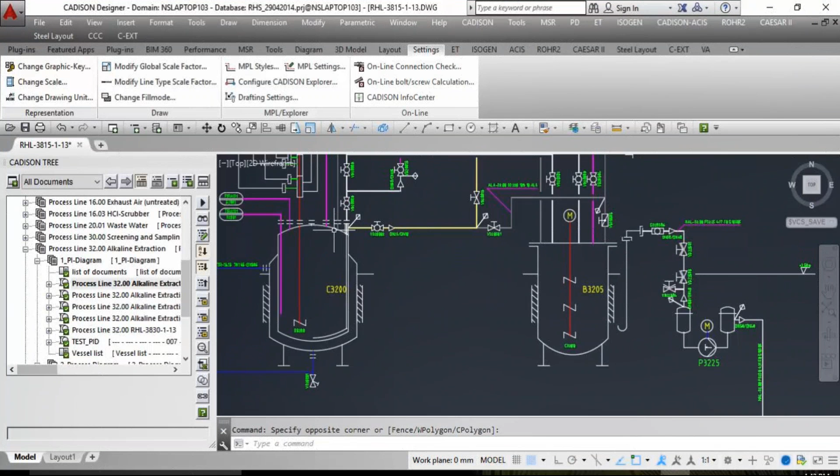Now let us quickly test it for a couple of equipments. We have two equipments: one is an autoclave and another one is a sedimentation tank. We will change the tag number for the autoclave to the same tag number as the sedimentation tank, save our drawing, and quickly run the logic analyzer to test for uniqueness of equipment tag numbers or duplication of tag numbers.

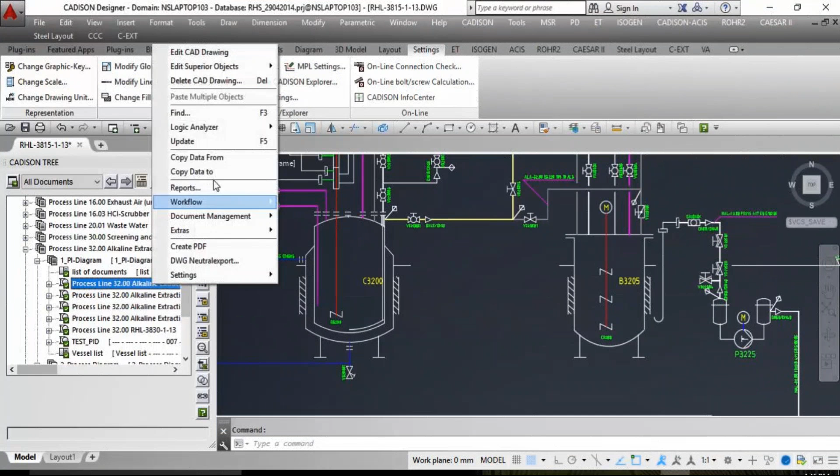We select uniqueness of equipment codes, and we see the description that the device tag of this device is not unique, showing the same tag numbers for both equipments. Now we can select one of the vessels and edit it. Here we can change the tag number that was first defined and close this dialog box. You can see in the drawing that the change has been updated. Now if we quickly run the logic analyzer again, that logical error has been removed.

So in this way, you can check your P&ID drawings for any error such as uniqueness of pipeline tag numbers, valve tag numbers, or equipment tag numbers, or any mismatch in your pipeline sizings. You can also create your own rules based upon your project requirements and add them so that you can perform your quality checking once your P&ID is done.

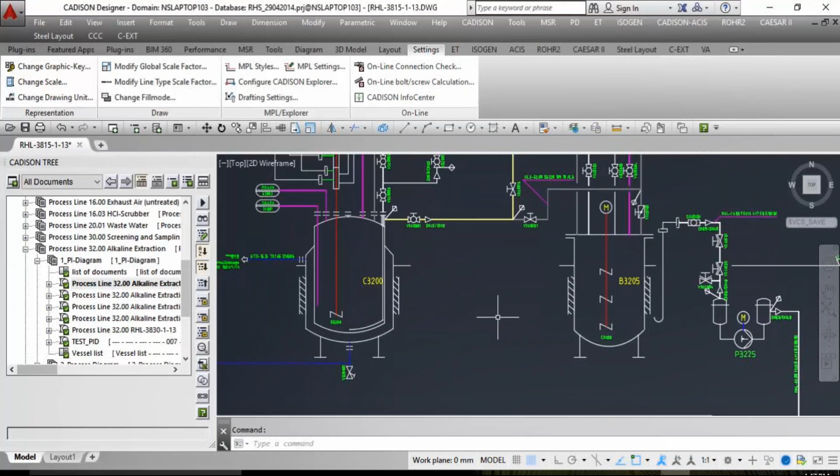So this was all related to the different key features of CADISON P&ID. There are different types of applications for intelligent and smart P&IDs. First is training. When a plant is in operation, existing users or process engineers know about the different plant areas, media, pipelines, and other specifications because they are working on it.

Now, if any new process engineers join, CADISON P&ID can be used to train the new team of process engineers, and they can get familiar with the existing plant operating conditions in terms of sub-plant areas and what media is flowing through different pipelines. New users can actually zoom and highlight the objects so that they can get familiar with the existing plant which is in operation.

Second application is as-built. Typically there are a lot of changes in the plant life cycle or during plant operation. The challenge is how this change management can go smoothly so different disciplines have the updated data. Here P&IDs can be used as an as-built document or a maintenance document from which you can get the updated data in the form of different reports.